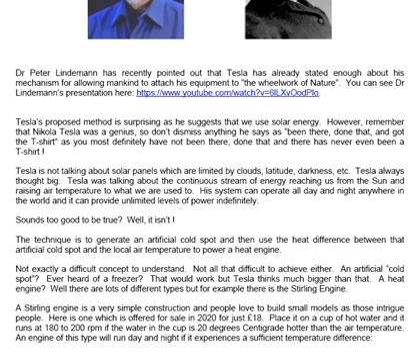Place it on a cup of hot water, and it runs at 180 to 200 revs per minute if the water in the cup is 20 degrees centigrade hotter than the air temperature. An engine of this type will run day and night if it experiences a sufficient temperature difference. This is what it looks like here, this particular one, which is offered for sale.

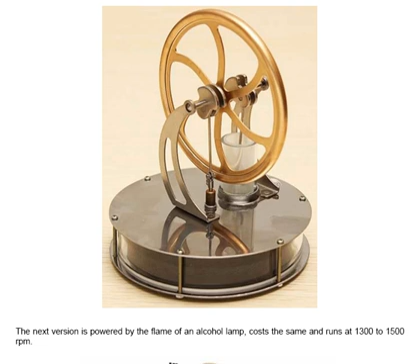The next version of heat engine, or in this case Stirling engine, is powered by the flame of an alcohol lamp. It costs the same, £18, and runs at 1300 to 1500 revs per minute. And this is the particular unit on offer. The bottle contains alcohol, and the flame from the wick heats up the air in this glass tube container here, and the engine revolves the flywheel here at a considerable rate for such a small device.

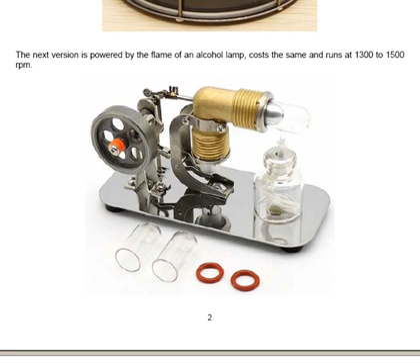It's also known as an external combustion engine. However, it is a heat engine, so if you can provide the heat difference without burning a fuel, it will run as well or better. These examples are considered to be educational toys which show the principle. Serious, bigger Stirling engines are a very different matter, and they can be very powerful. They can be used to provide mechanical power or to generate electricity.

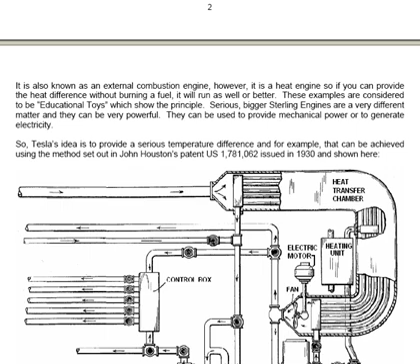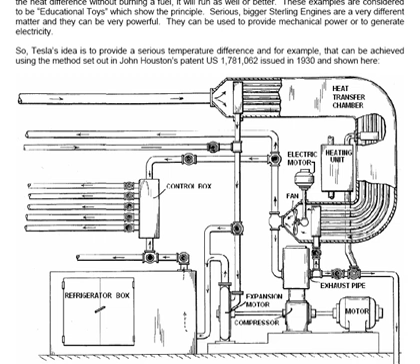So Tesla's idea is to provide a serious temperature difference, and for example, that can be achieved using the method set out in John Houston's patent US 1781062, issued in 1930 and shown here. This is the main diagram of the system. At first glance it looks complicated, but in reality it's very straightforward.

An important point is that the expansion motor shown above is powered by the expanding gas of the process, and that motor is this unit here. This is the expansion motor, and it is mounted on a drive shaft to the compressor, and while the motor can drive the compressor, and does, this expansion motor also provides driving power to the compressor, being the heart of the entire system. This reduces the drive power required to operate the compressor to just 15% of what it would otherwise have been.

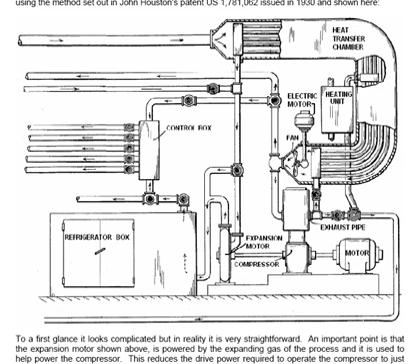The relevant documents mentioned here are reproduced below. It's important to understand that this system generates far more power than it needs to operate. Houston's design produces cold air at 34 degrees centigrade below zero, and that is 29 degrees Fahrenheit below zero. Also, Houston's system produces large volumes of both hot and cold air.

Quite apart from the major power generated separately by Tesla's heat engine, heating and cooling are the two largest requirements for a home or business, and that makes this a most desirable system to have.